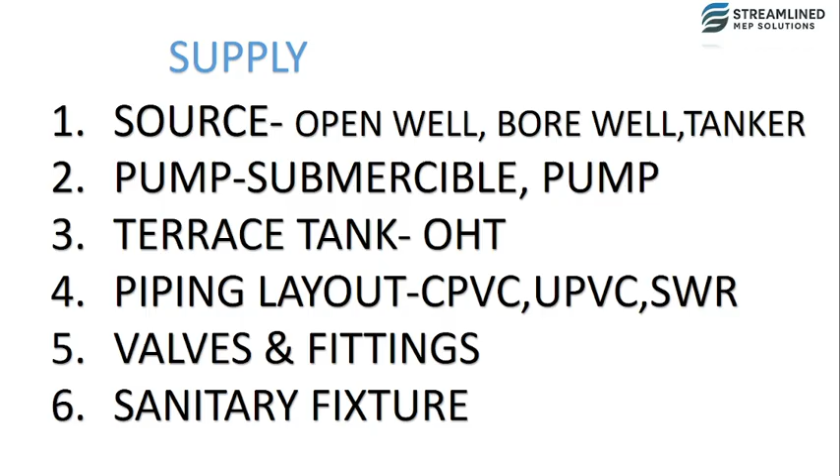So for the supply system, now imagine your house: from where water is taken, where it is going and how it is distributed. We will have a borewell. In the borewell one pump will be there, and by using that pump we'll take the water into the terrace tank. From the terrace tank, by gravity, water will flow through the pipe. In pipes we can see the fittings and valves also, and that will be connected to the bathroom or wherever required, to a tap or water closet or wash basin. So this is the sequence of operation.

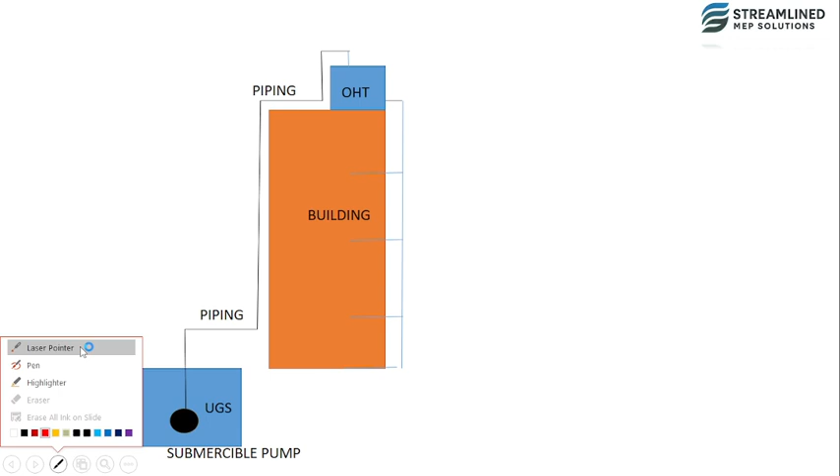Now for an idea, again I kept a pictorial representation here. We will have a UG sump. UG sump means underground sump. Either this will be a borewell or open well, or we'll construct a tank like this below the ground and store the water inside this tank. And from here, by using a pump, this one I kept is actually a submersible pump.

If it's a normal pump, it will come out of the UG sump. For that pump, there will be a suction head and a discharge head. Submersible pump means the suction head will be zero, direct foot valve only, then delivery will be there. So through this delivery pipe the overhead tank will be filled. Anyhow, this line will be connected on top of the tank only.

So where to connect, how to connect, those details also we require. So we will learn what types of tank are available in the market and how to do connectivity, all these things we need to learn. So anyhow, on top of the tank we'll connect the pipe, and through this the tank will be filled. After filling the tank, from here we'll take water by gravity only.

When height is there, potential energy will be there. So by height, by gravity, we will take the water to each floor wherever required. So this is the common practice on the supply side.

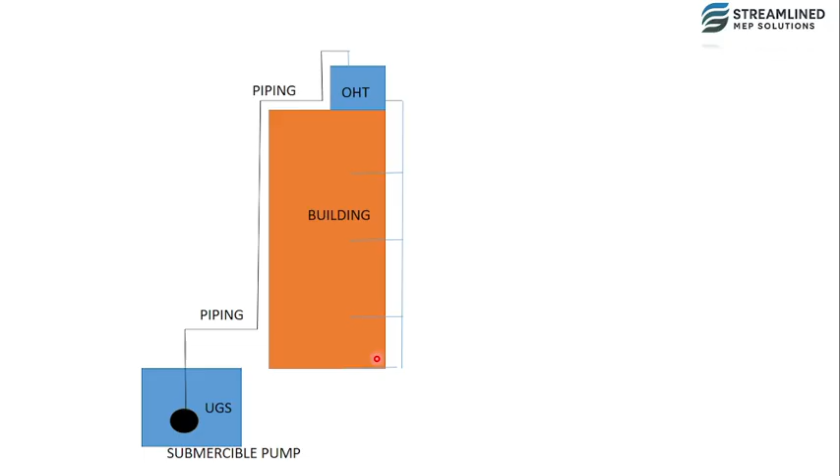Generally, we require these plumbing services for the kitchen area. In the kitchen area, water tap, purifiers, and kitchen sink will be there. And the work area is a separate section, part of the kitchen, where we place dishwashers, washing machine and all, or any floor trap and tap for cleaning purposes. So in that location it is also required. Of course, toilet area, wash area and laundry space, if any.

In hotel buildings and hospital buildings, a laundry area will be there. Dining area, landscape area, car wash area. When it comes to commercial buildings, pantry area. So several areas will be there. Where it is applicable, we have to provide plumbing services, maybe a single tap point or other services also. So depending on the area and the client, we will decide the requirement.

Anyhow, if we require a plumbing system, first we need to start from the source. Sources are of different types. Major sources are groundwater source, we can say underground water source, and surface water source. Underground means you have to dig and take the water. In that case we have two types of sources: one is open well and another one is bore well.

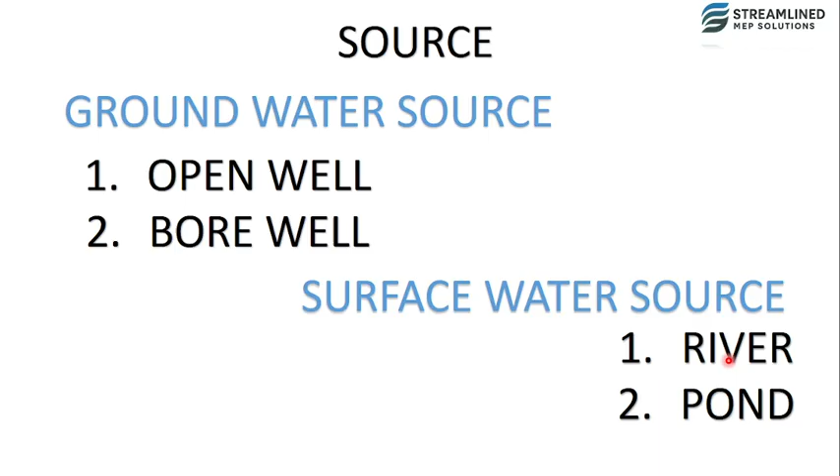Any of these sources will be available at your project location. So first we need to identify which source is available out of these two, and next we need to check whether it is sufficient or not. If it is not sufficient, we need to depend on an external water source. That might be municipal water, tanker water or bottled water.

Anything you can depend on. In Kerala, there will be Kerala Water Authority or Panchayat water. In Hyderabad, Manjira water will be there. So in different locations in India, their local water authority board will supply water. That is what I meant by municipal water. And you can also purchase water from a tanker and fill your sump. So depending on your water source and your requirement, you can depend on an external water source also.

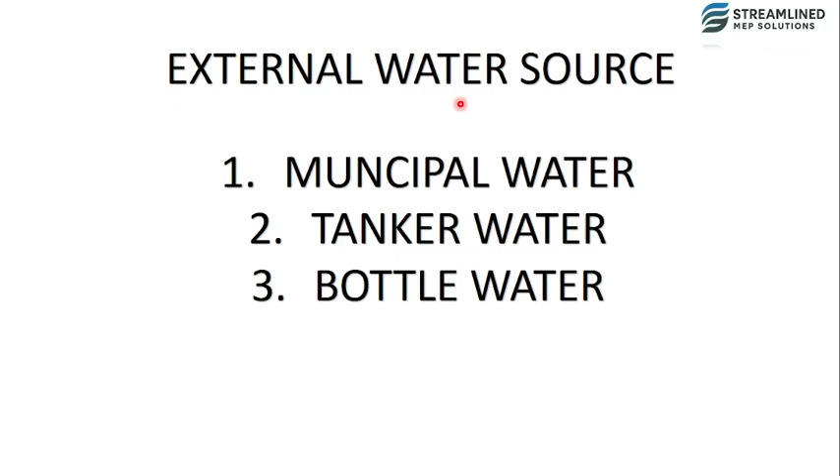So this provision will be there, especially for commercial and high-rise residential buildings, we will have this option also. So when it comes to source, whether we have a source or not, that is one criteria. The second criteria is water quality, how your source water quality is. That is very important. Based upon water quality only, further design will proceed.

If your quality is okay, you can directly proceed with the next stages. If your water quality is not good, you have to install water treatment plants, depending on the water quality. So which system you need to install and how to operate it totally depends on quality. To identify the quality of water, you must test the water.

Water can be tested in a lab, and for that we can call it a water sample test, like we do our blood and urine tests. In that, some parameters will be there, some marginal levels will be there, and what is in our blood, that value will be represented there. So by seeing that report, we can identify whether we are in the normal range or anything less, anything high. Based upon that only, the doctor also will give medicine.

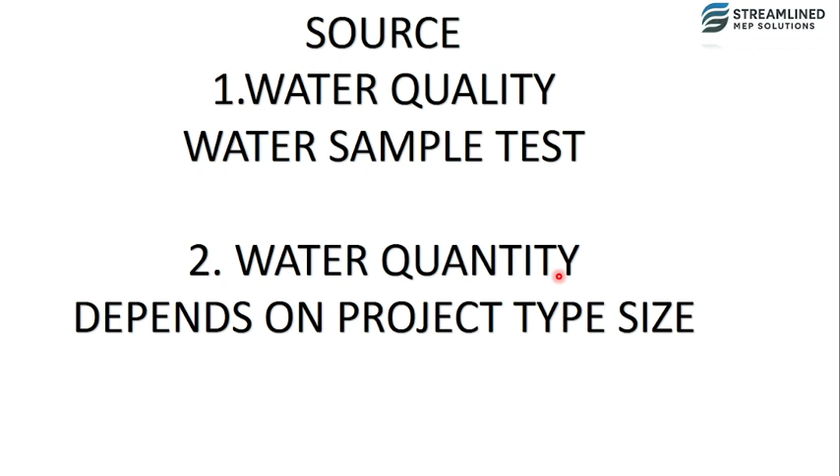First, we need to solve the water quality. When it comes to quality, by visual inspection we can identify it. If we see green color or black color or another shade in the water, then we can easily identify that this water is not good. And of course, stagnated water is also not good. And with the smell we can identify. And with the taste, from some hotels or some taps, if we take the water in our mouth, we can feel some iron taste or some sour taste, and with reference to that we can identify this water is not good.

Even sometimes if we buy mineral water, for that also some taste is there. With that taste also we can identify. So taste, odor, smell, visual, these four we can do. But in some cases the water will be extremely good in its appearance, but it might be hard water, salt water. When we keep that in a bucket for some time, you can see a white precipitation at the bottom of the bucket. That is salt water.

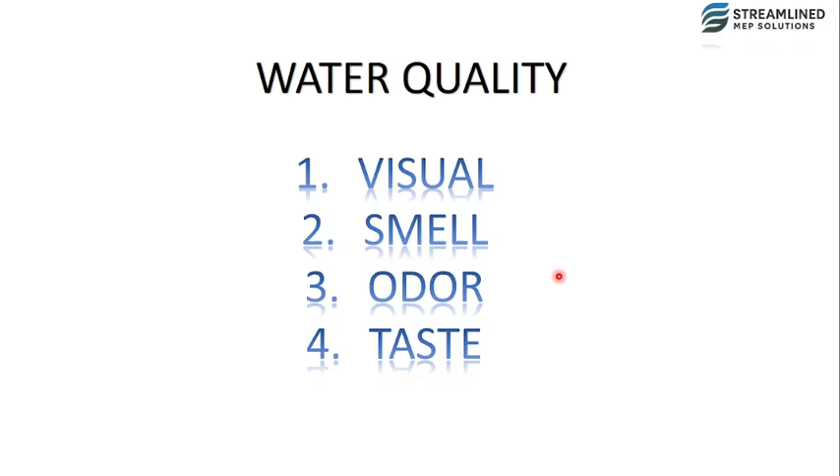So if the quality is okay, you can start the project. Otherwise, if it is not okay, as I already told you, a WTP is required. WTP means water treatment plant. In this category, we have different types of filters. Filters can be used to filter solid particles and chemical particles present in the water. And if the TDS value, total dissolved solids, is high and we want to reduce it, for that we can use RO filters.

If salt, calcium carbonate kind of things, is there, the hardness of the water will be more. If we want to reduce the hardness of the water, we can use water softeners. So depending on water quality only, we can finalize which of these we need to install. Sand filter and carbon filter we normally use to treat the water, to filter any chemical and physical parameters. A multigrade filter we normally use to treat rainwater.

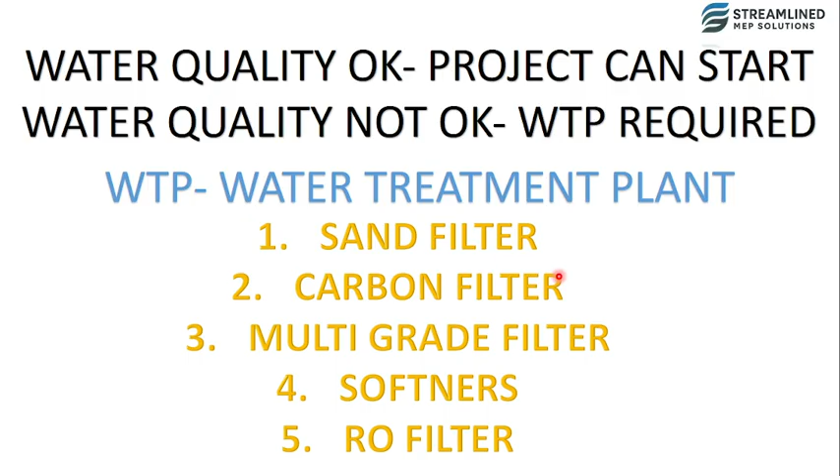If we want to use this water, we need to test it first, and after testing, install the appropriate treatment method before use. In some locations the values will be 1300, 1500 to 2000. That water is not at all recommended. If we want to use that water, we have to install water treatment plants. So that is required.

Next, all this water will be collected to a tank only. To collect that tank, we require inlet provisions. Normally all water inlets will be connected to the fire tank. If the building has fire protection system scope, then for fire purpose one dedicated tank will be there, and all the connections will be provided to that tank only.

Once the tank is filled, the overflow will be connected to plumbing related tanks. We always want to keep water in the fire tank. With that in mind, we connect all the inlets to the fire tank, and the overflow connects to our plumbing related tank. So in the fire tank also, there will always be water movement.

Stagnated water means smell issues will be created. So since there's always overflow, the water movement will be there, and that water is also good water. So all the inlets will go to the fire tank if it exists, otherwise to the plumbing tank.

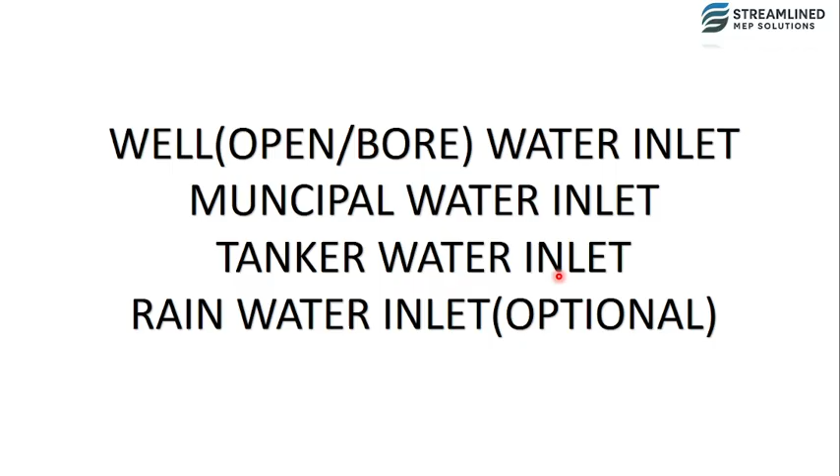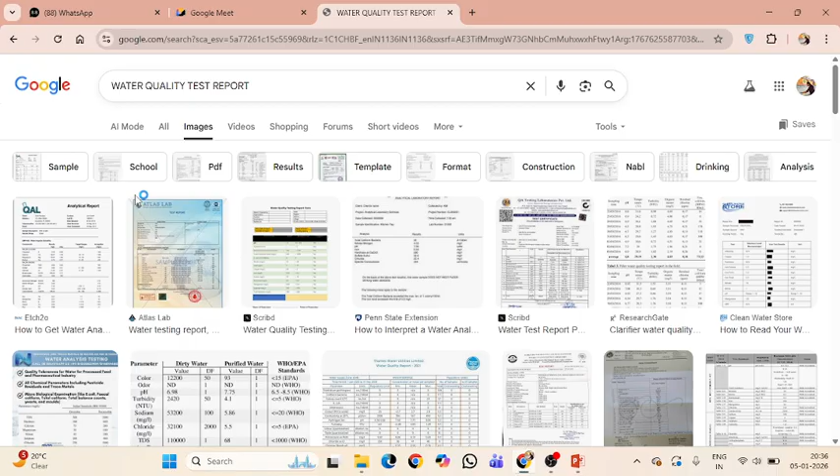And if your water is not good, we need to install a WTP. That also depends on the test result. So for example, I'll show you one sample test result - from Google only, but this will give you an idea.

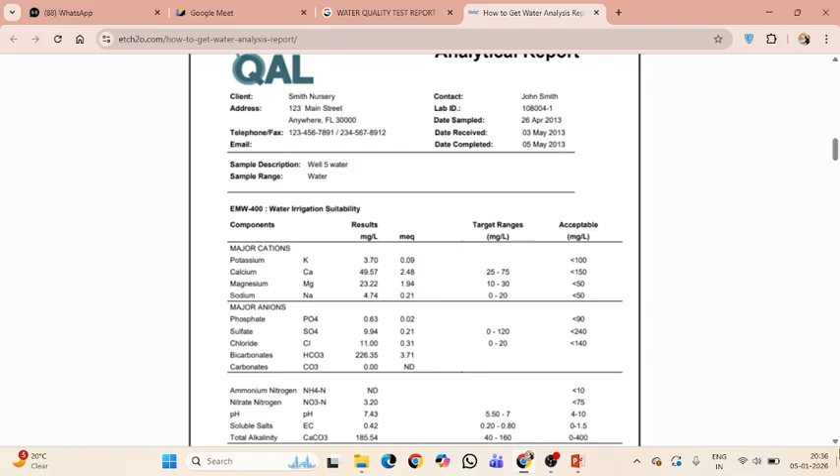See here, this is well water. Some mineral components are there. In this result, after testing, the target range is given along with the acceptable value - this target range is what we need to focus on. This is our tested result. So in the water, potassium, calcium, magnesium, sodium, phosphate, sulfate, chloride, bicarbonates, carbonates - all items are listed here.

Even the pH value - here pH value is 7.43, but we require 5.5 to 7 only. So this is higher. And soluble salts are there - salt is okay, but here bicarbonates are more.

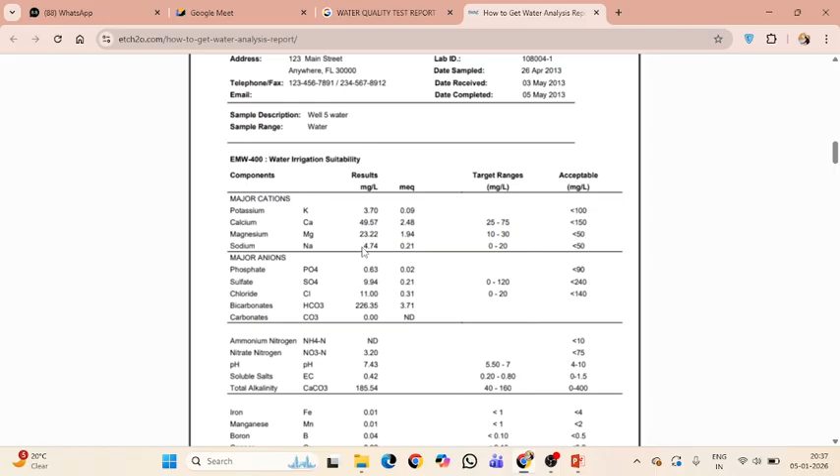We also check other values - iron, manganese, boron - these are all okay. So for calcium carbonate, see here 185 is present, but actually 40 to 160 is permitted. It is more than that.

So like this, we get to know the quality of the water, and with reference to this we can choose the water treatment system. Anyhow, we need to reduce the alkalinity, so for this we need to install a water softener. The value parameter and pH value is there, so we need to install a water softener plus sand filter and carbon filter.

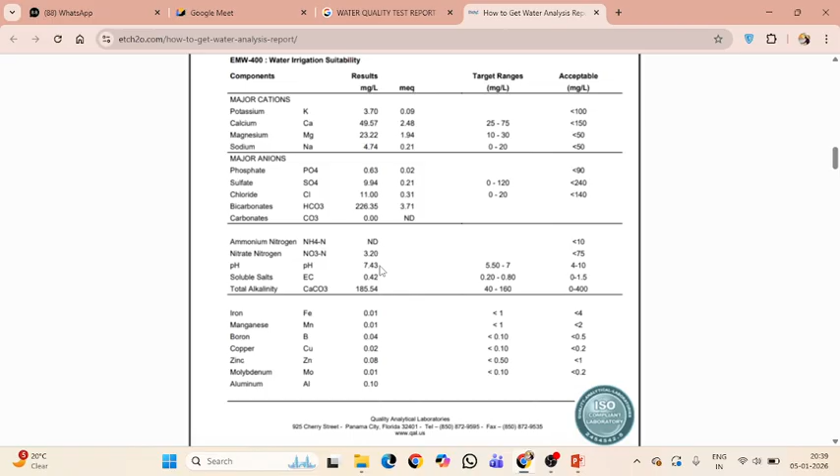So to identify this, we use a water sample test. Once this test report is done, we can submit it to the WTP team. For water treatment plants, a dedicated team will be there - they will analyze it again, and based upon this they will recommend the product, and accordingly we can install it at the site. Once this is done, the second stage is water quantity selection.